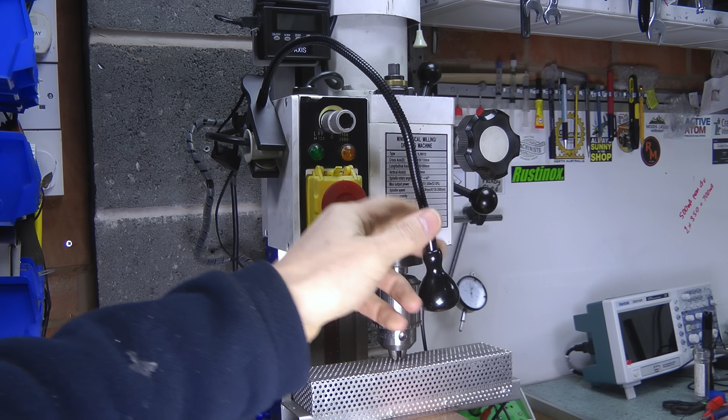Since I got my mini mill, I've been using an Ikea gooseneck lamp to see what I'm doing, and it works pretty well. I like that it's small and unobtrusive and generates almost no heat, and it's pretty bright. I have a couple of others around the place for the same reason.

A particularly good feature is that they're powered from simple linear regulators, so there's no flicker or strobing. Two 7135s drive 250 mA apiece into a forward drop of a little over 3 volts, which is roughly 1.5 watts. So why look for a replacement? Well, they do have a couple of big downsides. The first is the gooseneck has a mind of its own.

Second, for filming, it has a really warm colour temperature compared to the other much colder LED lights that I have. And this makes it much more difficult to achieve a consistent look between shots. What I had in mind was to put a car headlight LED ring around the spindle. These days, this idea might seem a bit old hat, but back in 2016, when this project first started, it was still fairly novel.

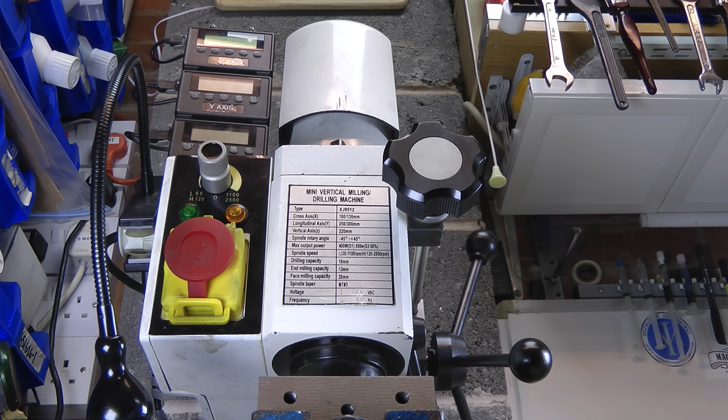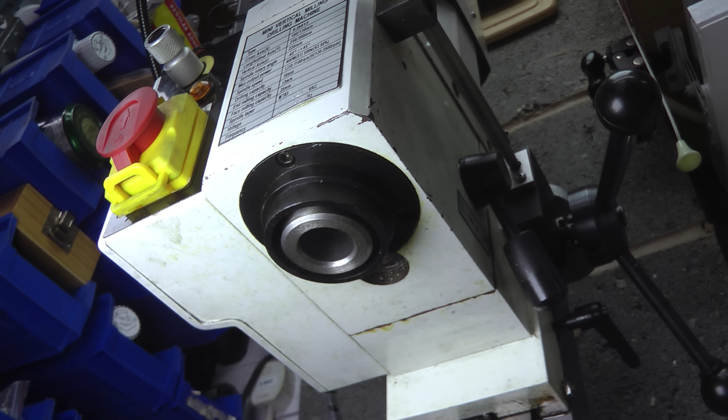My intention was to fit the LED ring using magnets, something like this. The eBay listing I used gave sizes, but not how they were measured, so I took a guess and ordered the 70mm lights. When they arrived from the Far East a couple of months later, it became clear the dimension quoted was the OD of the board, which meant the ring was a little bit small for what I had in mind. So I ordered a set of 80mm in the hope they'd fit better.

They duly arrived after another couple of months, and they were more suitable, but by that time I'd moved on to other things. So all the LEDs were consigned to the stack of paused project tins. You know how it is. Fast forward 6 years and they resurfaced, and I realised it was something I really ought to get finished.

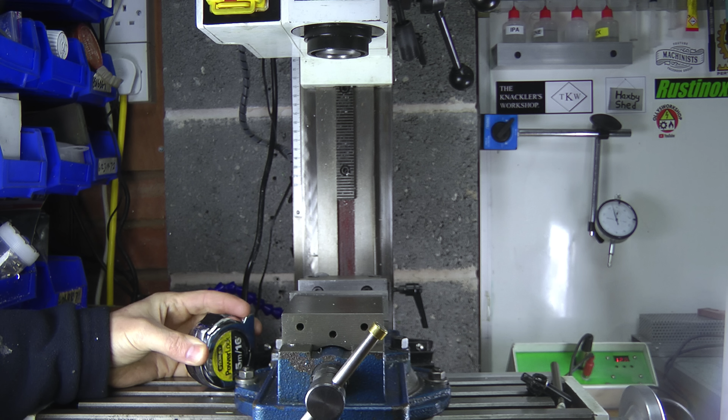Having thought about it a bit more, I realised the work envelope of these small machines is tight enough, without deliberately adding stuff to get in the way. And I wasn't really sold on the magnetic fixing idea either. I mostly cut non-ferrous and plastic, but I do use steel, and the swarf would get drawn to it, well, like a magnet, so I had a bit of a rethink.

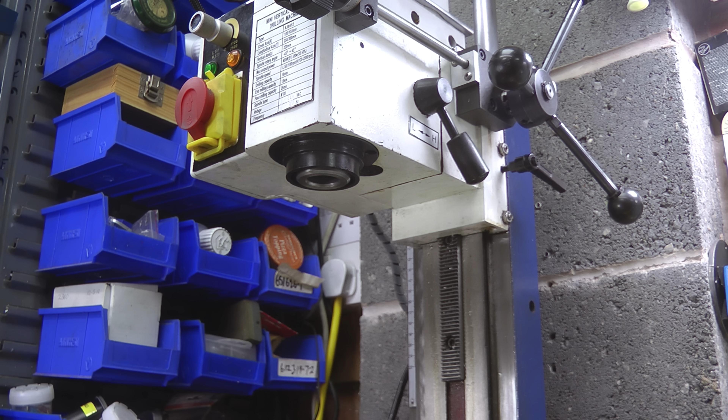I'd always assumed the black thing on the bottom of the head was made of cast iron and was somehow important, but as part of replacing a grumbling bearing a while back, I found out it's just a plastic cover. You might be able to guess where I'm going with this.

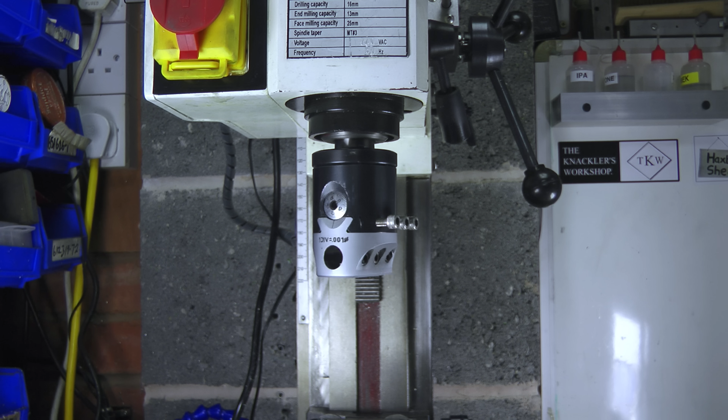Instead of having the light fit around the plastic cover, I reckoned I could make an entirely new cover that would incorporate the LEDs. A couple of things I might have to consider along the way would be how effective the light would be when using larger diameter tools like a collet chuck or a boring head, and whether I'd need some sort of shroud to reduce the glare and the chances of it getting bashed.

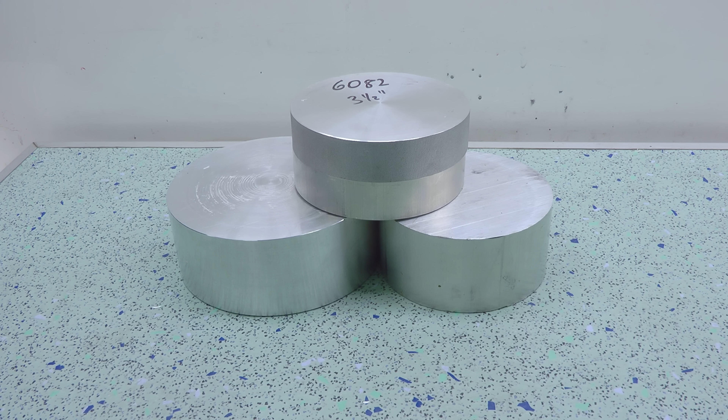A 50mm ring would have been perfect, but that seems to be an unusual size, so I went for 60mm, which is more common and was available with a diffuser. I had a 20mm slice of 3.5-inch aluminium in stock, so that would be the start of the build.

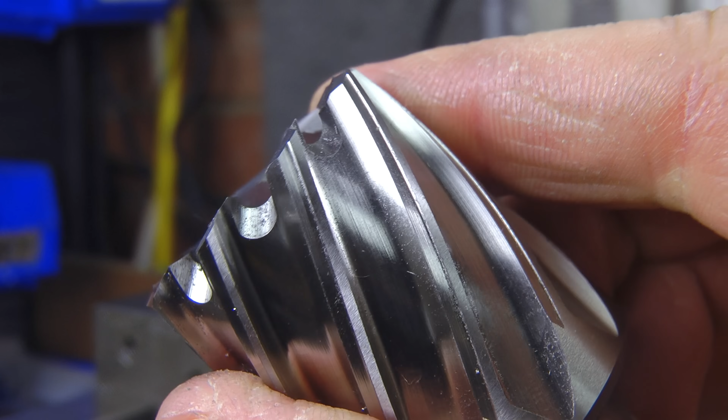Just for a bit of variety, I thought I'd start the hole off with an annular cutter, rather than a drill. After dialing in the aluminium disc, I fitted the cutter in an ER32 collet. I do plan to make a proper holder one day. There's slightly less waste here as the plug from the centre can be reused, rather than the whole thing just turning to swarf.

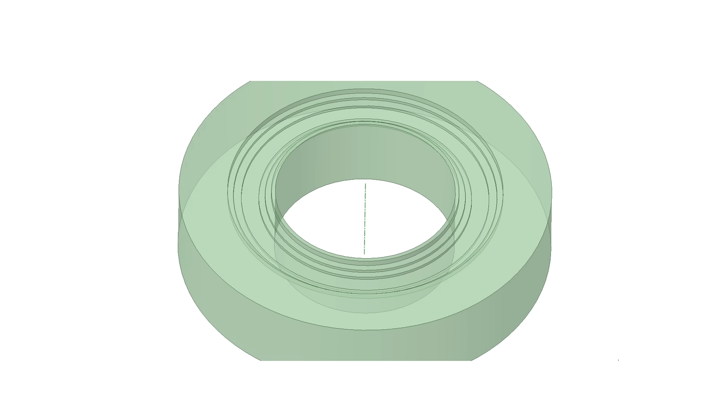Over on the lathe, I opened out the centre to 43mm, so it was large enough to clear the mill spindle. Next, I needed to add a series of step grooves. The deepest would be to seat the LED ring itself, the next locates the diffuser, and the last provides space to run a bead of low viscosity silicone to seal the assembly against fluid ingress.

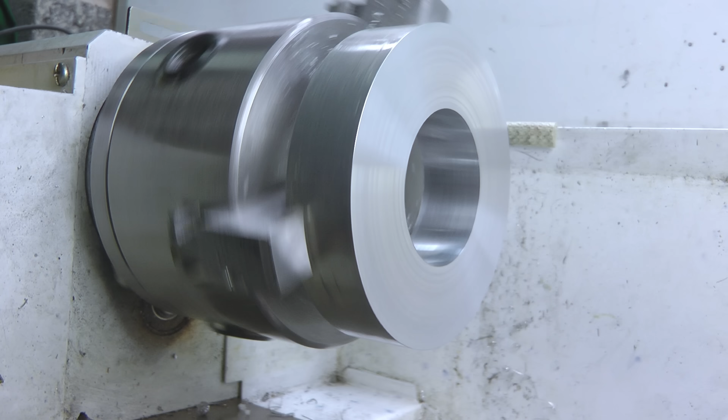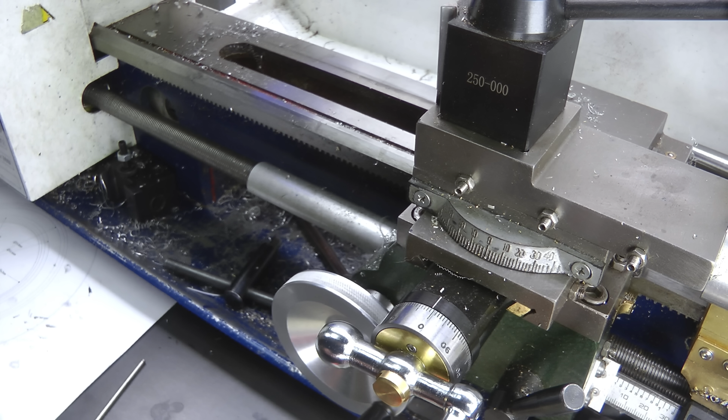I marked up the surface to make a stuff-up less likely, as there wouldn't be enough material left to erase a mistake and start over. The next part was a bit of an experiment. I needed some sort of grooving tool, and I figured a round D-bit would give me a head start by having built-in side clearance. I knew I had a couple of pieces of 1/8 high-speed steel sat in the drawer, so I had nothing to lose.

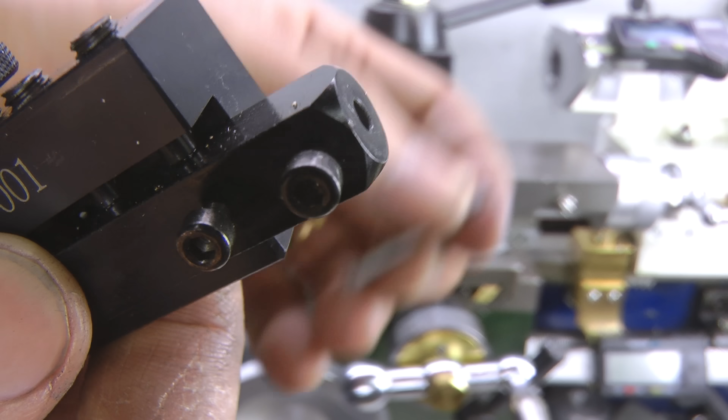I had a feeling that a small cutter that was twice as wide as it was thick might complain a bit, and it didn't disappoint.

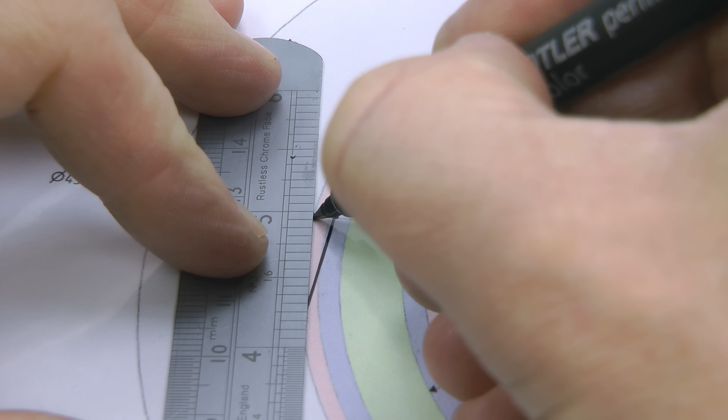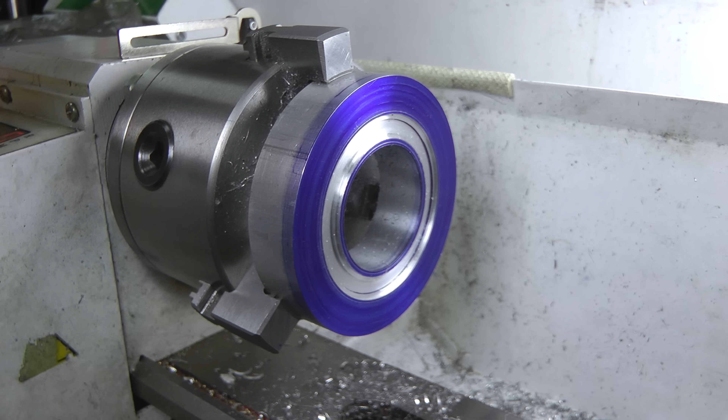Now what I should have done at this point was walk away and take a minute to figure out what a better tool might have looked like. If I'd picked the right angles, I could have got better stiffness and clearance at both sides. But instead I battled stubbornly on, resorting to turning the chuck by hand to stop the chatter when the tool was contacting full width. In fairness, it wasn't too bad when it was just nibbling away at the sides. I got there in the end though, and I learnt how not to do it next time.

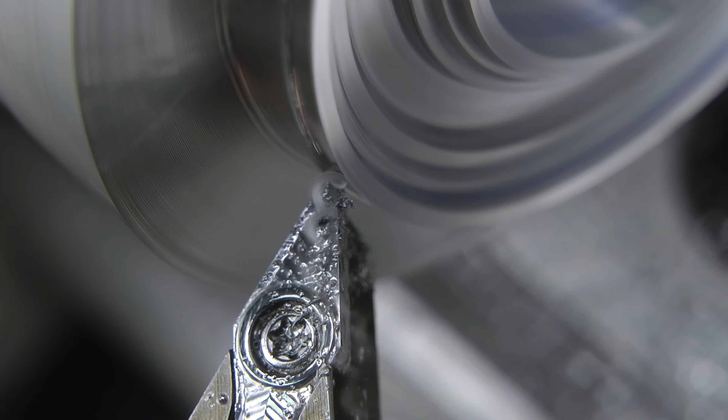The next thing was to remove some of the spare meat on the OD. I'd also have to waste the middle to accommodate the mounting screws. I kept easing off the feed to break the long strings of swarf before they grew to a dangerous length. I was approaching the size limit of my little machine, and I had to rotate the compound to get enough clearance between the tool and the work.

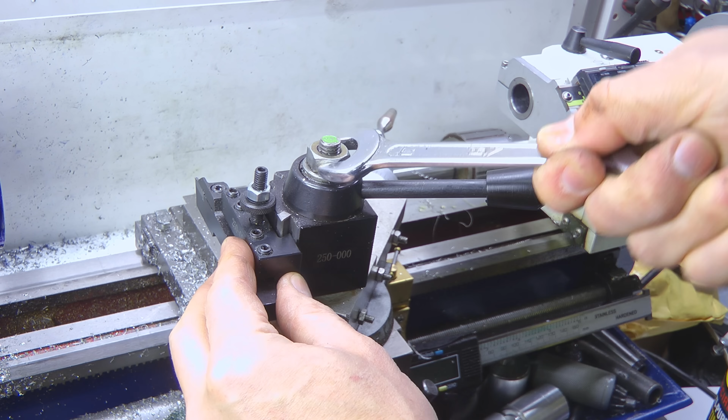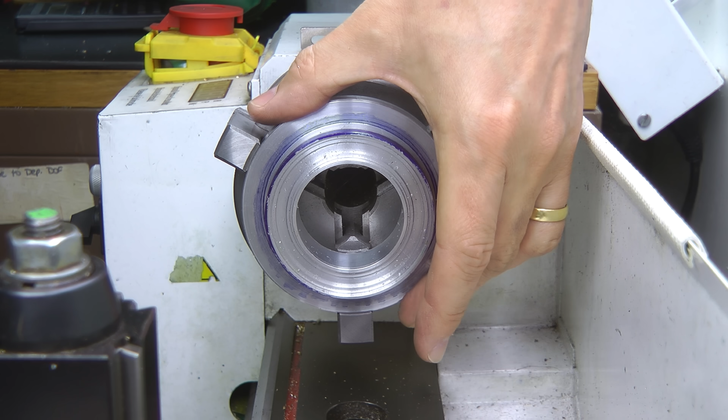I cut away as much as I dare, and then before I ended up crashing into the chuck, I swapped to internal jaws to bring it to final size from the other side.

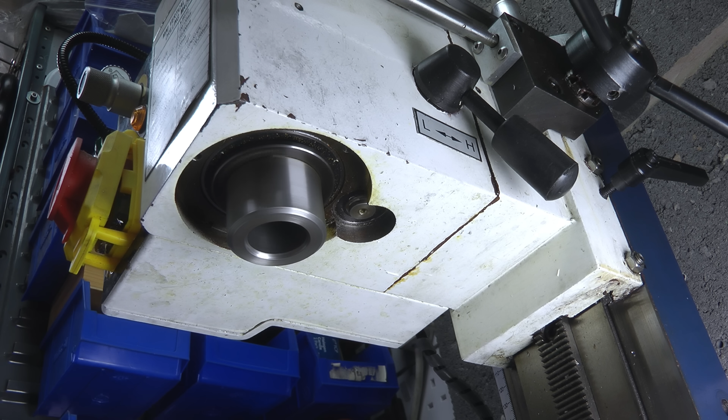With the turning complete, I centred the part under the mill and added holes for the fixing screws. I used coordinate drilling rather than the rotary table, as it was quicker to set up. So the ring wouldn't rub on the end of the mill's countershaft, I cut a small relief in the edge.

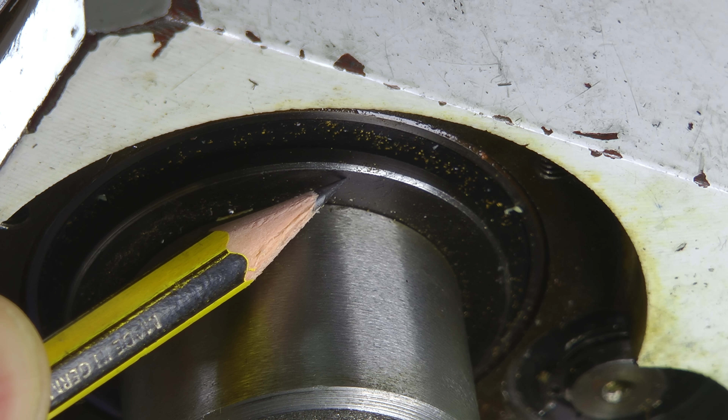When I offered it up to check the fit, I realised something wasn't quite right. I'd forgotten about the washer on the bottom of the spindle. But a few minutes back on the lathe sorted it. I also realised that the screws I planned to use wouldn't fit in the space I had available, so I made up some fixtures from some bits of scrap to help me modify the screws to suit.

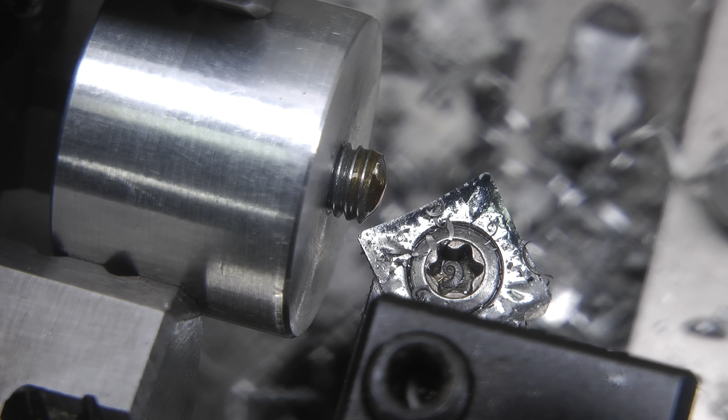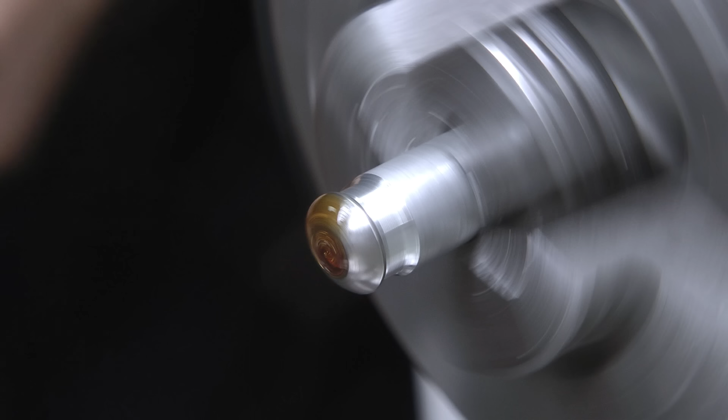I trimmed a few millimetres off the length. I chamfered the raw edge. And I reduced the head diameter. To reprofile the head, I set the compound to put the tool on the back of the job, so I had to run the spindle in reverse.

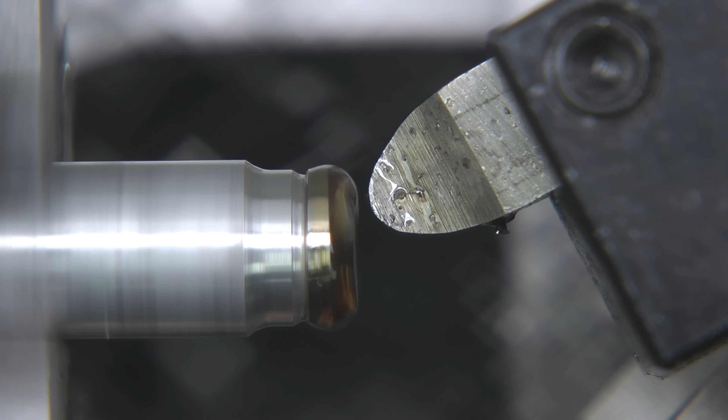I took really light cuts here, as if the tool had grabbed, it would have unscrewed the work out of the fixture. I made a couple of spares whilst I had the stuff out, as there's no doubt I'd have lost one if I'd only made the 3 I needed.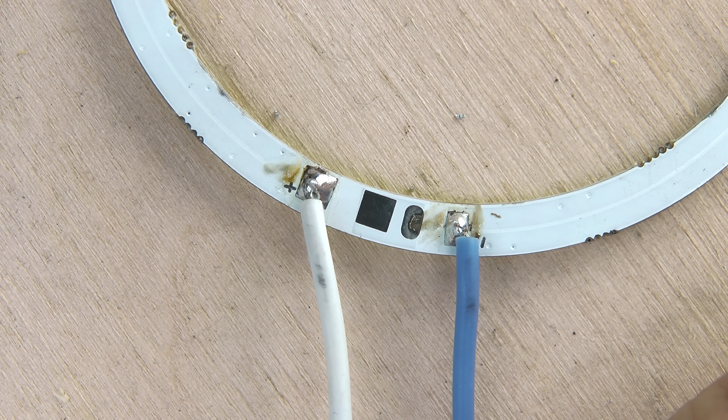To minimise the chances of the wires getting tangled up on anything, I wanted the power to the LEDs to be as unobtrusive as possible, so I started by removing the existing connections. It was here I first noticed the cutout sections on the edge of the PCB. I'd assumed these were from where tabs had held a circle as part of a larger board during production, but on closer inspection they were actually through-hole vias.

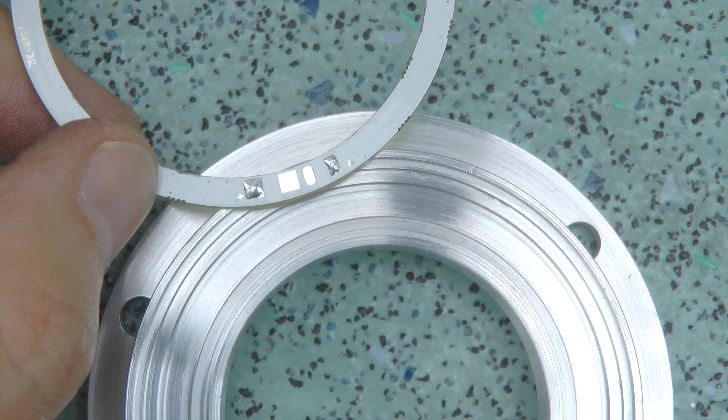They didn't appear to be connected to anything, but I'd have to watch that they didn't cause any shorts when mounted in the aluminium ring. Anyhow, to clear the solder points, I'd need to cut a relief in the front and drill through the side for the wires to exit.

Here I plan to make some kind of saddle arrangement with a tube to take the wires safely to the back of the machine, where there's a spare threaded hole that I could pick up to mount some sort of terminal box. To cut the relief for the connections, I set up the rotary table,

and after what felt like about 4 hours of fiddling, I got the ring running true on the table and the table running true on the spindle axis. It only dawned on me once I'd finished that for what I was doing there was no need for the work to be central under the spindle. Still, I probably needed the practice.

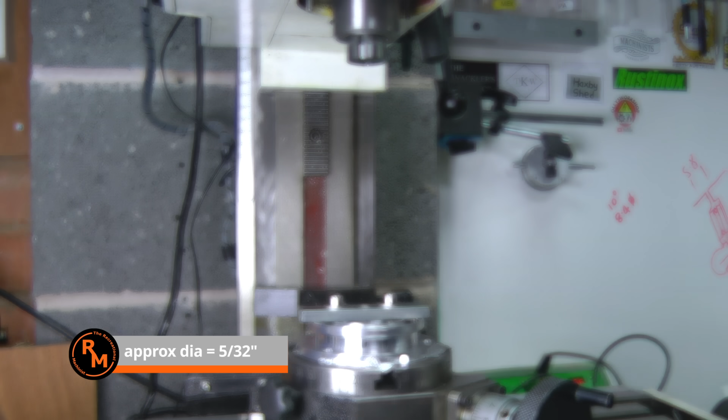The 4mm slot I'd be cutting would be about 3 times deeper than it is wide, and to stop the cutter from clogging up, I set a fine nozzle of compressed air to help clear the chips.

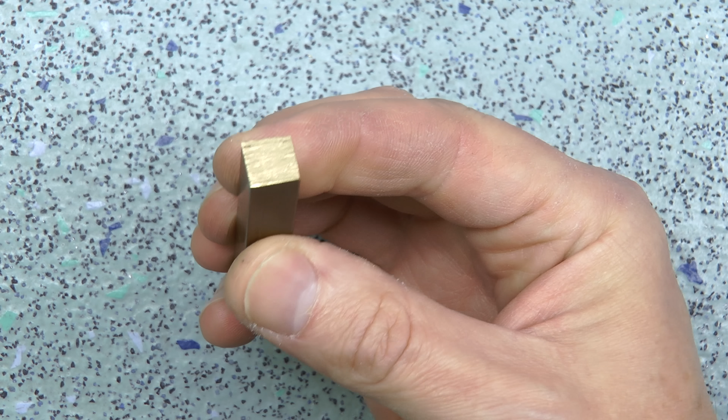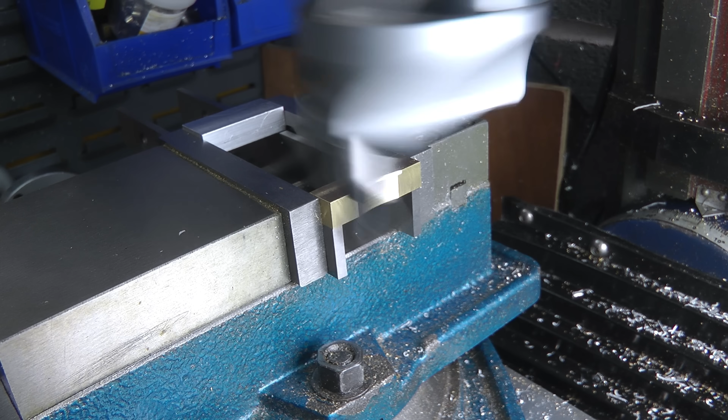To make the saddle, I took a piece of 3/8 square brass, trued it up on the mill, and reduced the thickness to fit the side of the ring. Whilst I was at it, I cut a scrap of aluminium to the same length to span the other side of the vise. Then I nibbled away at the brass with the boring head.

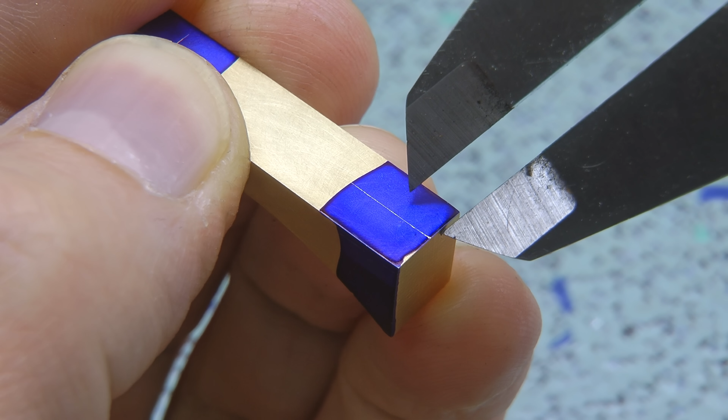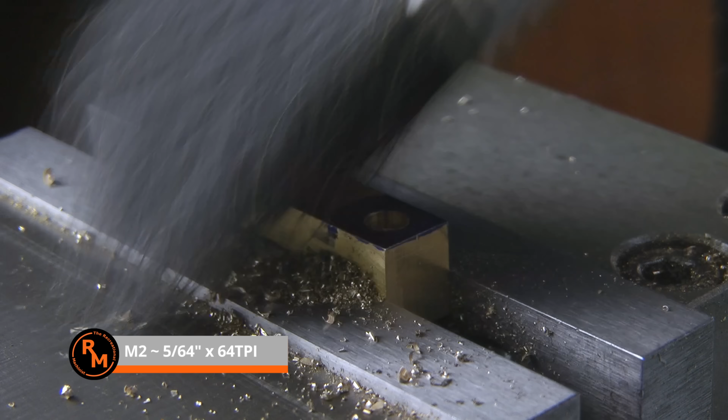I drilled and counterbored holes to take M2 cap heads, and then used the saddle as a template to make the holes in the ring itself.

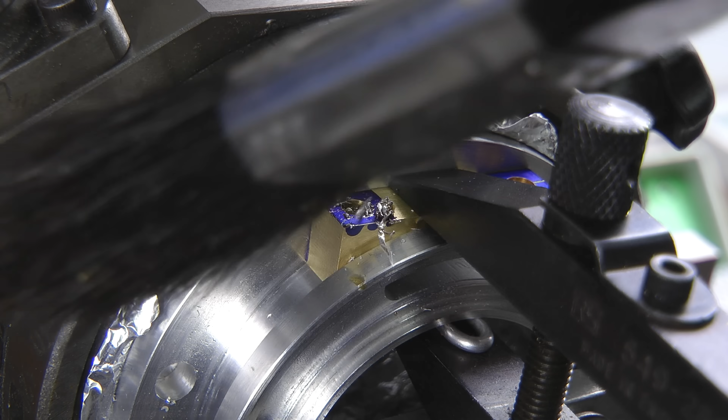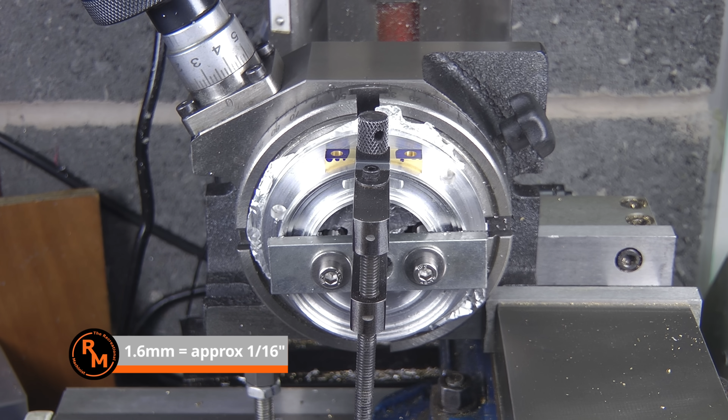Admittedly, this setup's a bit sketchy, but it only had to withstand drilling two 1.6mm holes, and it was a lot quicker than removing and then retramming the vise. Using a sharpened 3mm rod, I marked out where I would need to drill to take the brass wire protection tube.

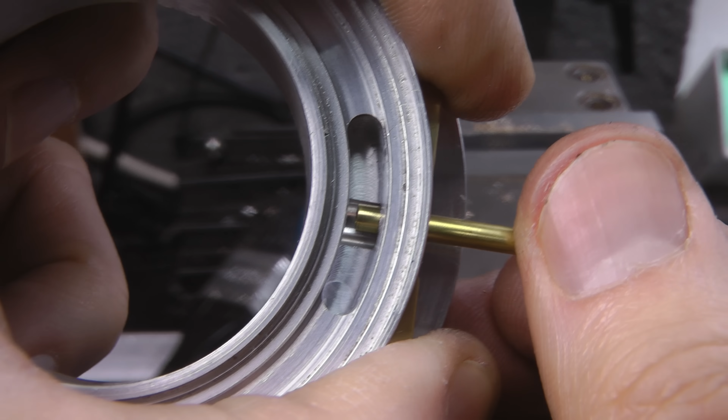At this point I took a break from the machining to figure out how I'd power the light. As supplied, the ring was so bright it would likely be annoying, plus I was concerned it might be really overdriven, which would shorten its life. It does come with an inline something, but I imagined it just contained a resistor and perhaps a diode.

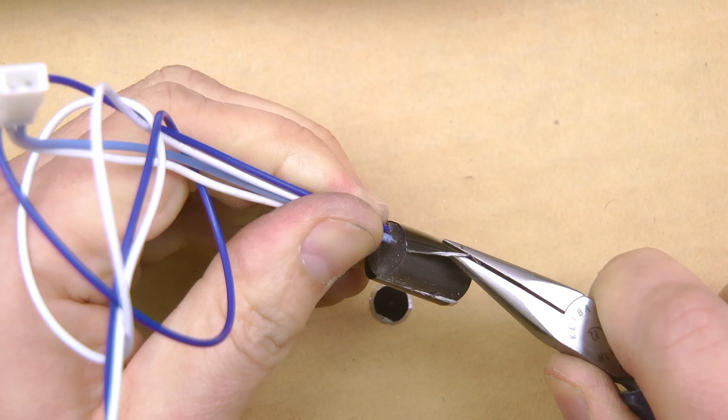But when I dug through the potting compound, I was surprised to find a fully formed driver. I managed to find a datasheet on the TP8005, but there was only so much I could get from it. What I could see is that the design was lifted straight from the PDF.

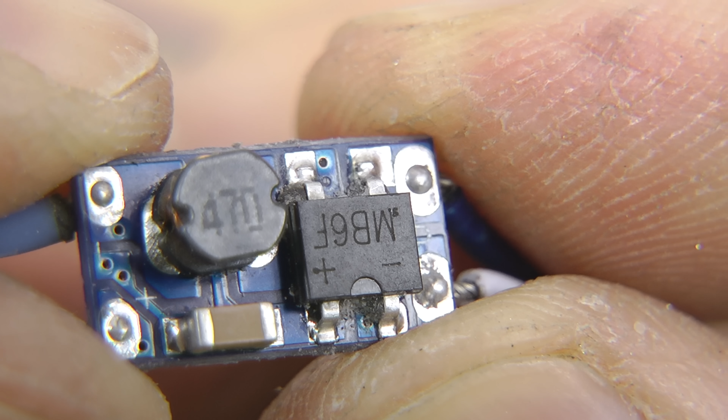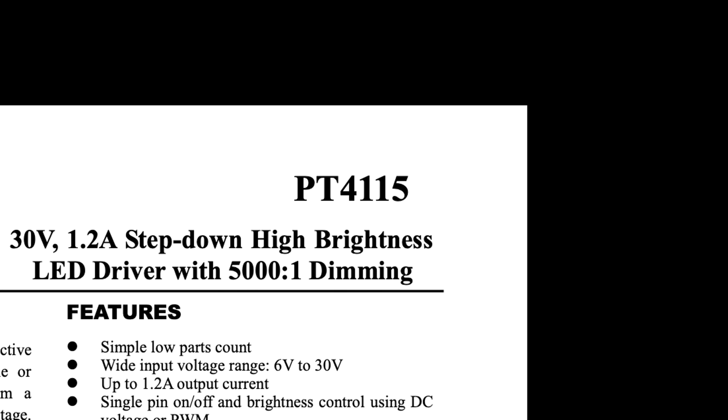As a comparison, I had a look at the driver circuit from one of the larger rings I'd decided not to use, and found this contained a PT4115. Now this one I managed to find an English PDF for, and apart from the maximum supply voltage, it appeared to be identical to the TP8005.

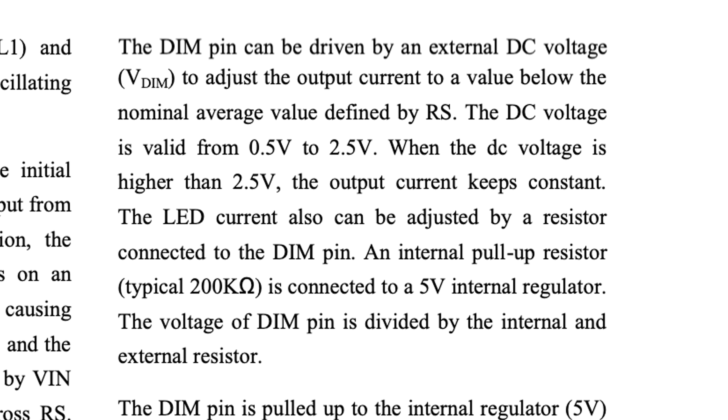Thanks to the datasheet, I could see that the driver featured built-in dimming, which might save me the effort of designing something from scratch. So I did a bit of testing to see if what I'd already got was suitable for what I had in mind. When being driven with 188 mA, the ring has a forward voltage of around 8.4 volts. That's a total power consumption of just 1.6 watts.

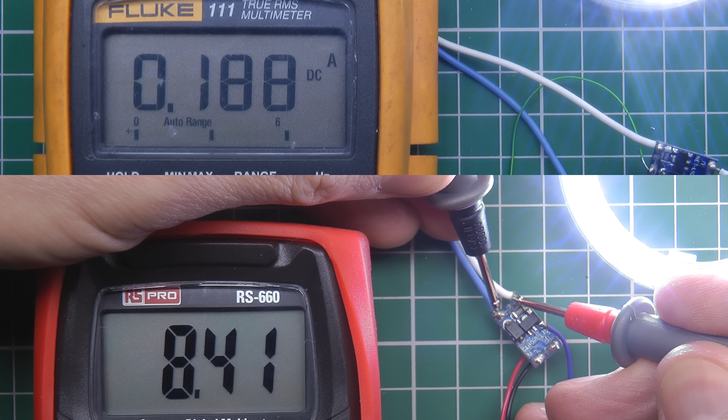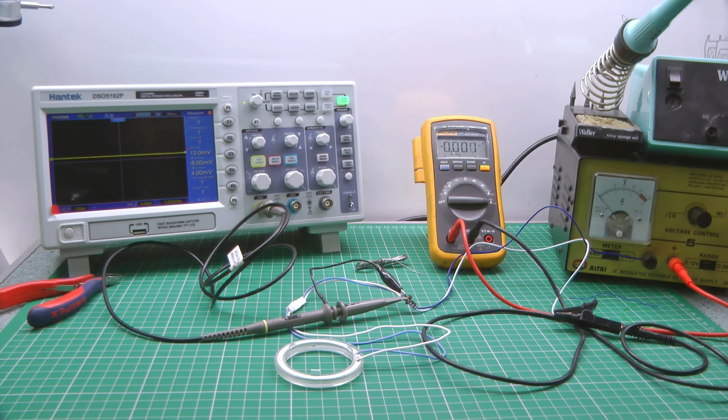Now the 60mm ring has a total of 36 LED elements, which means each LED dissipates around 40 milliwatts. In spite of the high brightness, this is much less than I'd imagined, and made me far less concerned about the thing burning out after a few hours' use. Sat on top of the 8.4 volt drive is around 1/3 of a volt of 380 kHz ripple. This frequency is high enough not to cause any flicker issues with the camera, and although this frequency varies with supply voltage, I didn't expect it would cause me any problems.

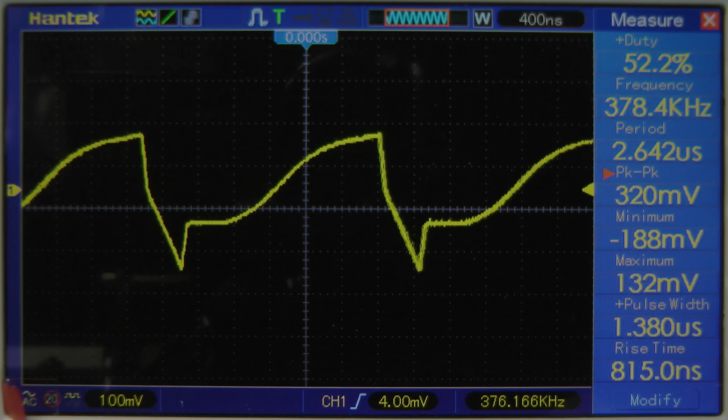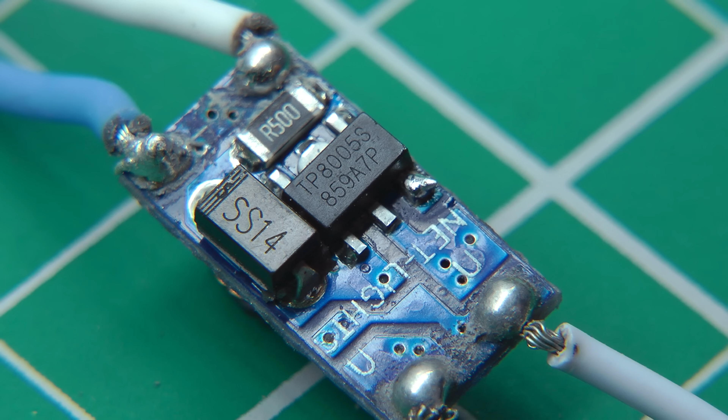Next I had to play with the dimming function. As I wouldn't be powering it with AC, I could ignore the rectifier on the input. I added a standard 7805 3-terminal regulator and halved its output across a divider made from a fixed resistor and a pot. This gave a stable but variable control voltage of 0 to 2.5 volts, which could be applied to the dim pin of the driver.

So far so good. With just a slight modification and suitably housed in a die-cast box, it looked as though the existing regulator would do everything I needed. So I gathered some strip board and a handful of components and built the power supply.

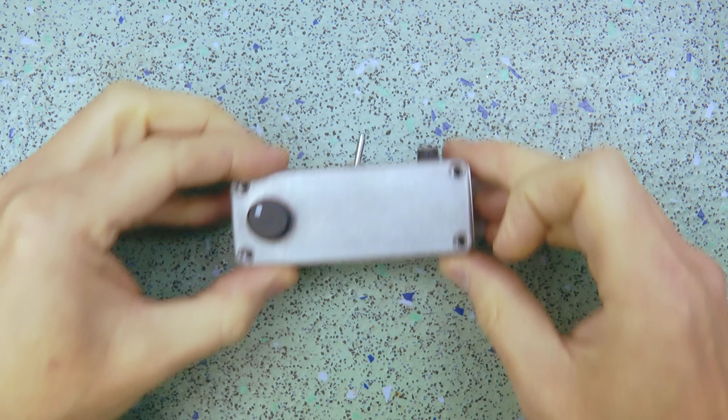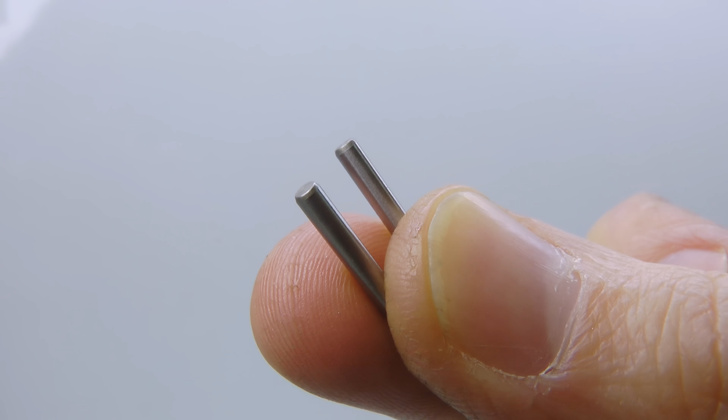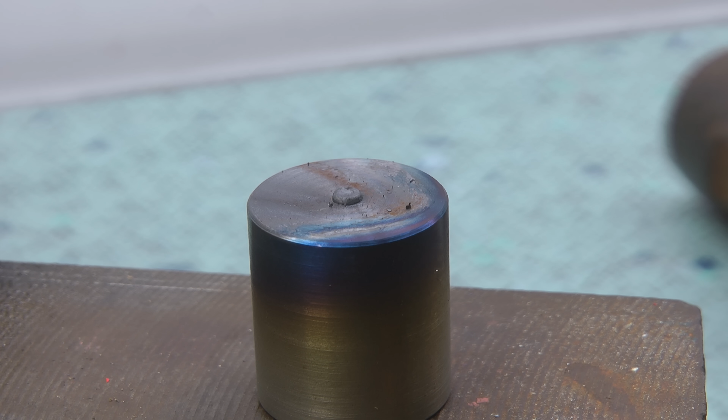I'd not really thought through the wire protection tube at the power supply end, but I soon realised curving the tube would be the easiest solution. I made up a template from soft copper wire and then scanned it in to have a fixed copy that wouldn't get bent out of shape kicking around on the bench. I took a couple of dowel pins and peened the ends so they wouldn't just fall inside, and then fitted them to the tube to help stop the ends from being distorted.

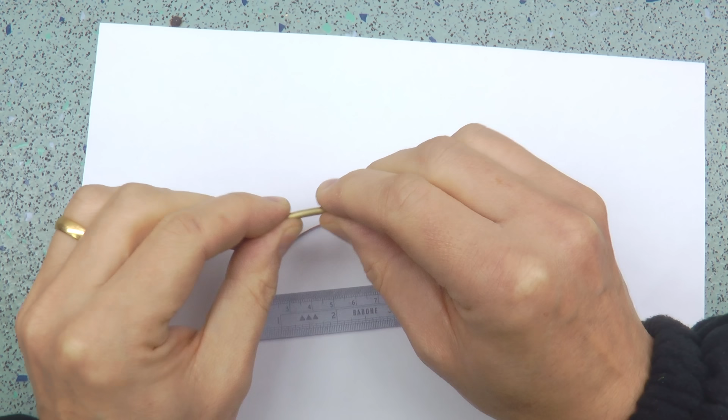Although the S-bend isn't really severe, the thin wall brass tube is really quite stiff, and I was concerned I'd kink it and I'd have to wait for the postman to bring me some more. So I annealed it to give me the best possible chance of it working. I was surprised by just how malleable it became.

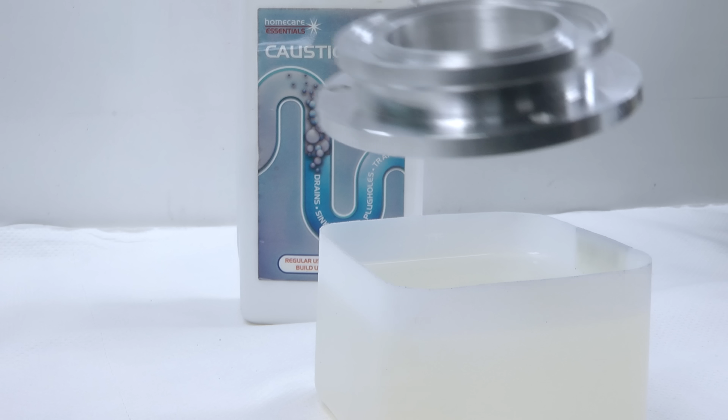I decided to anodise the ring. If I'm honest, it was mostly because I've not done any for a while, and I like to keep my hand in. After a thorough degrease in acetone, the ring was moved to a sodium hydroxide bath to etch the surface. Then it went into the acid bath.

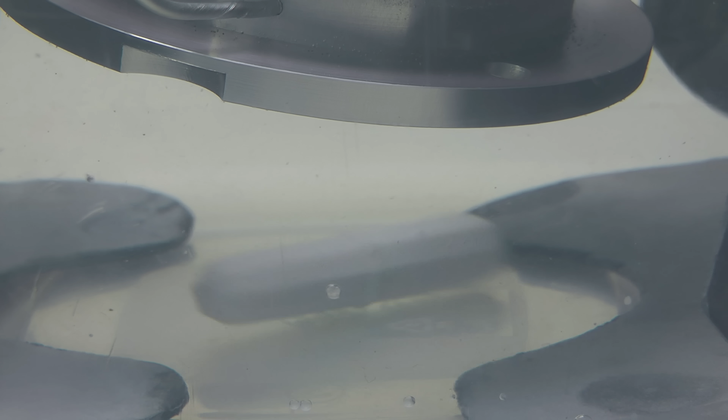Having a CAD drawing of the ring made figuring out the surface area for the current calculation much easier. It got 120 minutes at 1100 milliamps. I turned the ring a couple of times to try and make sure that no surface was shielded from the current. The dye bath was next. Finally, it was sealed in boiling water for half an hour or so.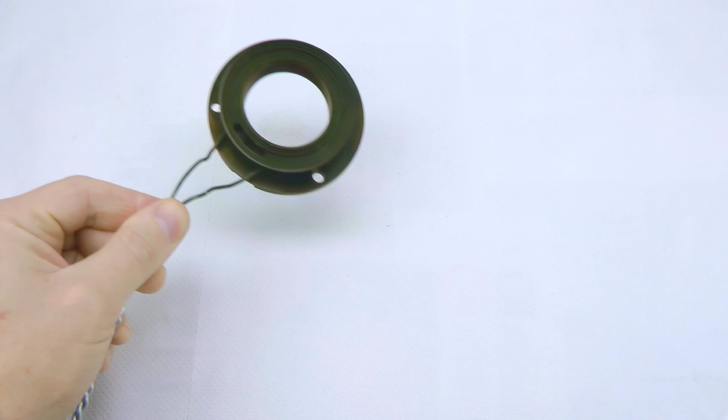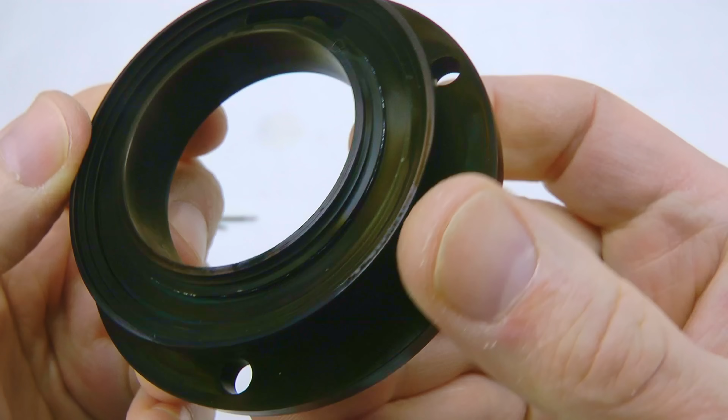I'd give this attempt maybe 8 out of 10. It's pretty even, but the colour isn't perfect. It has a bit of a green tinge to it. I've had excellent blacks from this method and dye before. It might be the particular alloy that I'm using, or more likely the black dye was a little bit weak, as I had to over-dilute it to make the bath deep enough to suit the container I was using. Either way, it doesn't really matter for this project.

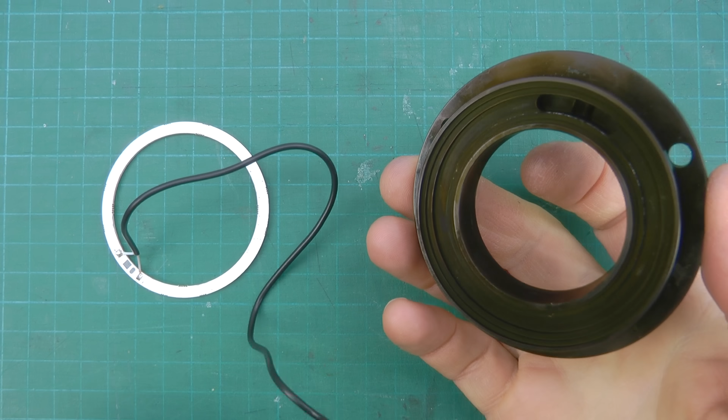The time to actually fit the LEDs to the ring had finally come. It was starting to look like the project might actually get finished this time. Even though they don't generate much heat, I used a thermally conductive adhesive to stick the LEDs to the metal ring. The lens was stuck in place with a low viscosity flowable silicone sealant, and once the excess was cleaned up with a cotton bud, it didn't look half bad.

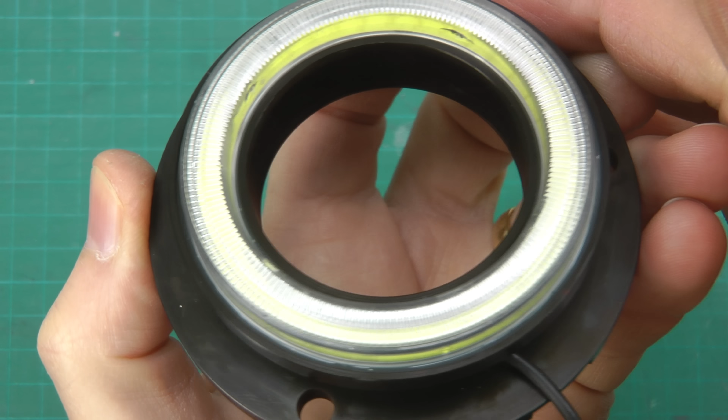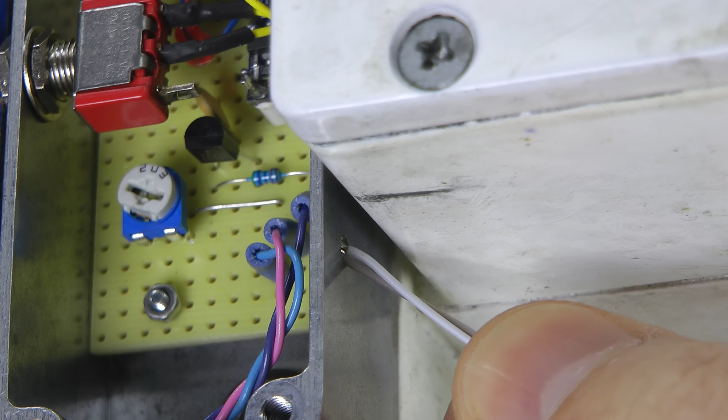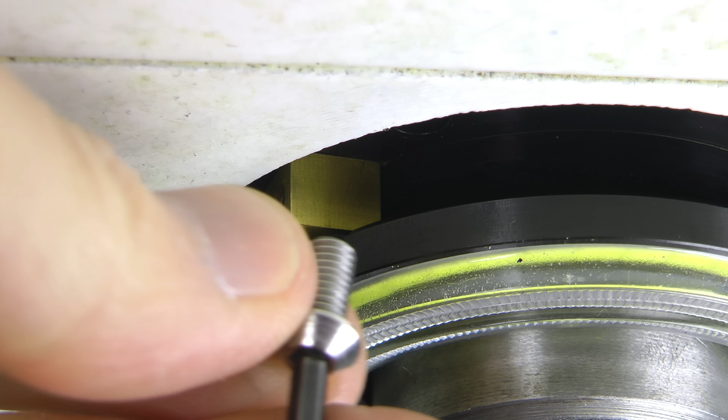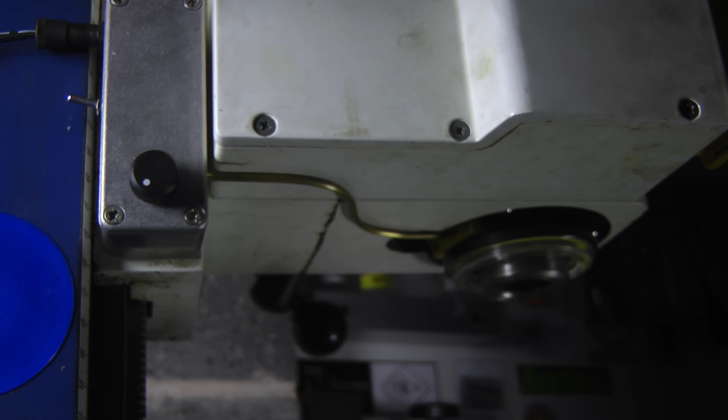I added a drop of soft solder to the wire protection tube before fitting it to the ring. And then it was just a case of fitting everything together. It's been a long time in the making, but it seems to work pretty well.

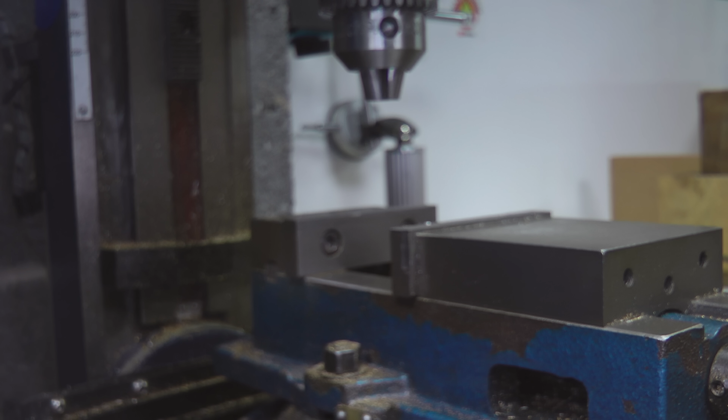If you were wondering what became of the other LED rings that were the wrong size, well, they won't go to waste. I've used one of them already. And the Ikea goosenecks? Well, I'm not usually sentimental about lamps, but we've had too many adventures to just bin them. So I fashioned a crude reflow plate by fitting a piece of copper into a soldering iron and swapped the warm diodes for cool ones, so they'll continue to be part of the workshop.